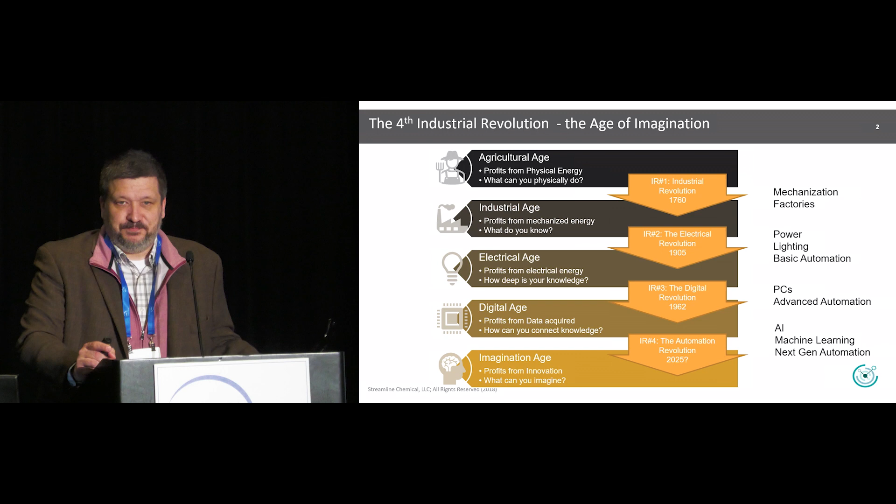And now we're entering the next revolution. This is the age of imagination, if you want to call it. And the question is no longer how can we use computers, but how can we use our imagination, and how can we think outside the box to make things better.

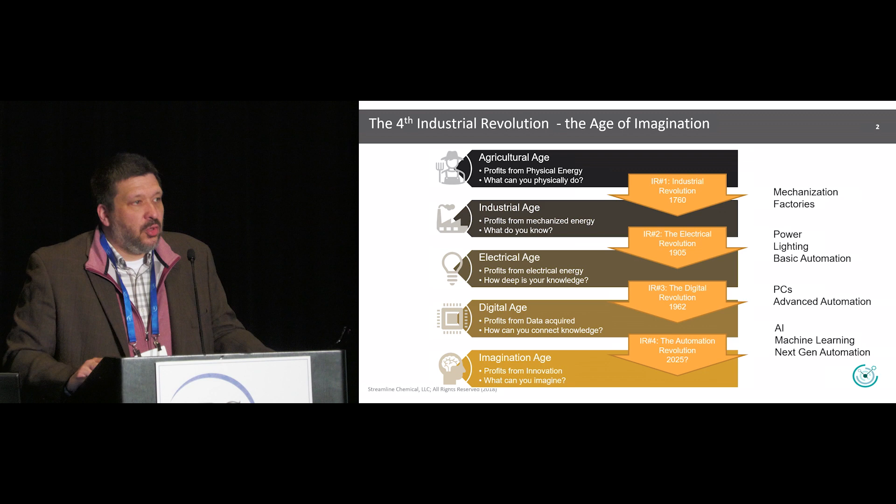Someone mentioned a Star Trek Next Generation scene where the chief engineer says, computer, check the tachyon, blah, blah, blah, and the computer was able to do it. And the question is, how do we get there? My comment is we're kind of almost there from a technology standpoint. The technology always precedes the practicality, which always precedes the oil and gas industry, which is always 30 years behind.

So here's my question. If we can literally take natural language processing and convert that to a bunch of parameters, which then can convert to an image, a photorealistic image of 2 chickens riding a motorcycle that look like stuffed animals driving across a bridge, why can't we apply that to our industry? Why can't we apply that to automation?

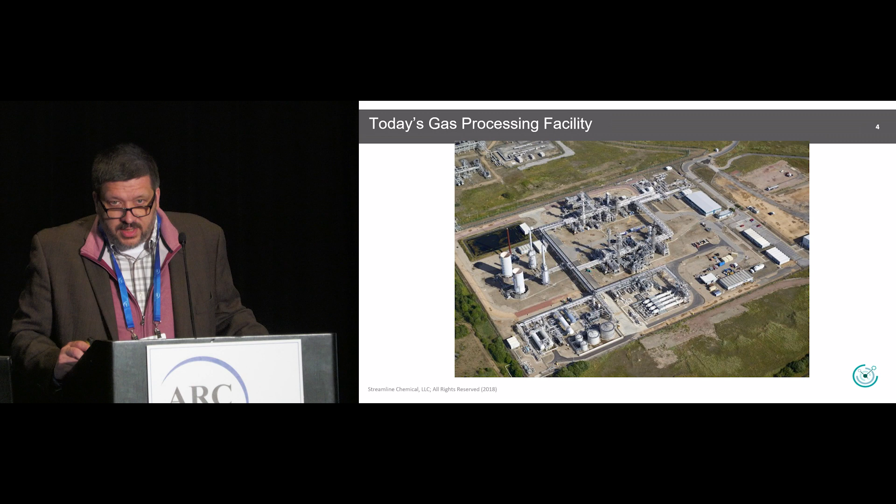So I'm going to show a picture that's familiar to a lot of people in this room. This is a gas processing facility, and I want you to try to take what I just said about DALL-E and apply it to the thought here, okay?

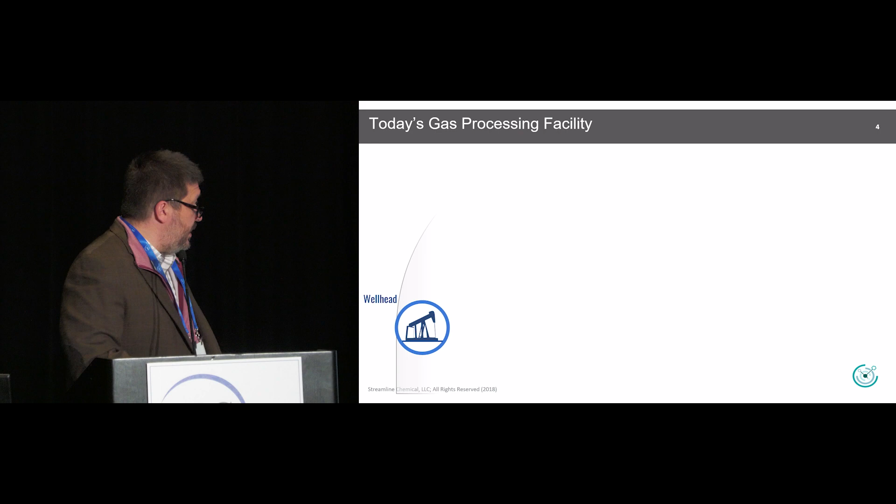So let's simplify this image. You have a wellhead, and then you have a pathway all the way to, say, the sales pipeline or to your stovetop, if you will. And there's a host of pieces of equipment between the beginning and the end.

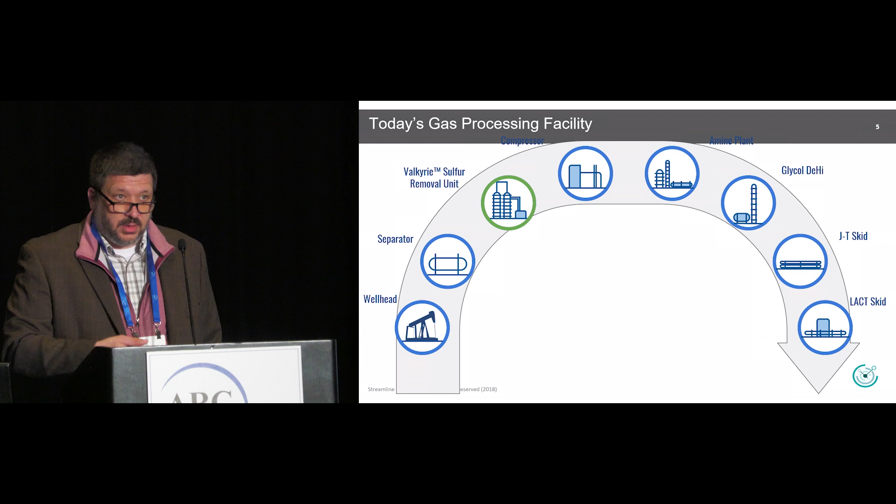And this is our product right here. The third one in is our product, in green here. There it is. I'll get to the story that we've made our unit smart, and I'll talk a little bit about what we do in a second. But for now, take my word, we've made this unit smart.

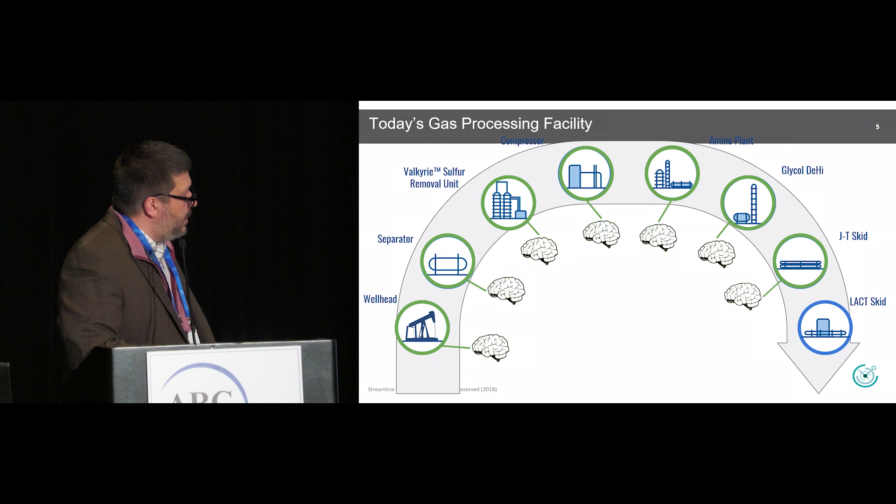But what would happen if we went through this entire gas processing facility and made everything smart? We'll define smart in a minute, but go with it for now. And then we took a hyperbrain and made them all communicate to each other. So you would have a machine learning gas processing facility. You no longer have smart pieces of equipment. This is a smart facility. So this is IIoT brought up to the next level.

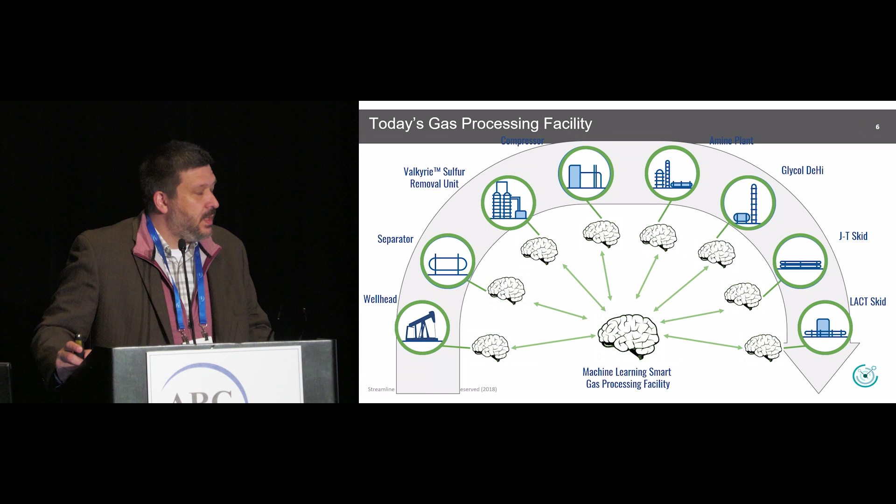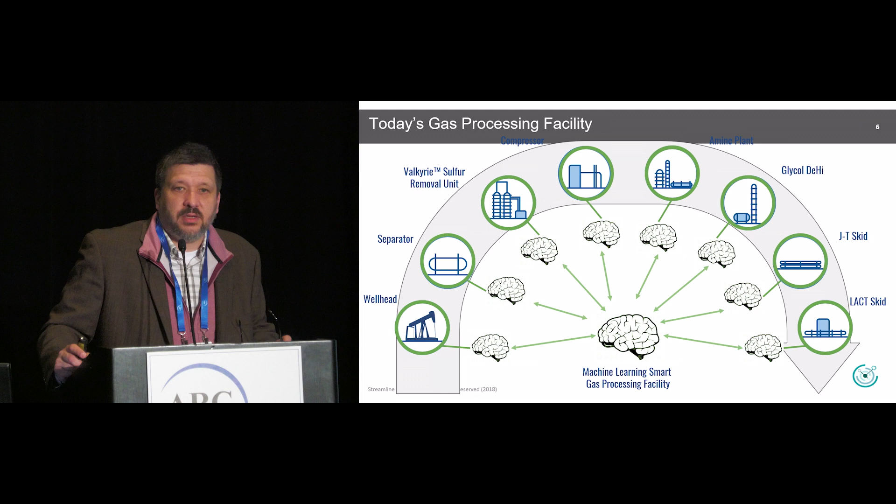Well, I'm going to show you we've done this to our unit, and we've made it smart, and nothing along that system can't be made the same magic we've done to our units, and nothing there is beyond the realm of modern technology. However, how many people here have a fully functional, smart, self-automated gas processing facility? I think we represent probably all the super majors in this room. We'll all say no.

Imagine this: you have sensors at the wellhead that detect a problem, and before it even makes it to the glycol dehy unit, it's already changing its flow rate, changing its temperature to adjust for the problem that happened 30 minutes in advance.

Because the wellhead knows that there's suddenly an influx of water, or the temperature suddenly dropped, or the gas flow rate changed, or the liquid water cuts changed. Any of those factors could come into play, and the amine plant can adjust its flow rate, or add defoamer because it knows something's going to go wrong.

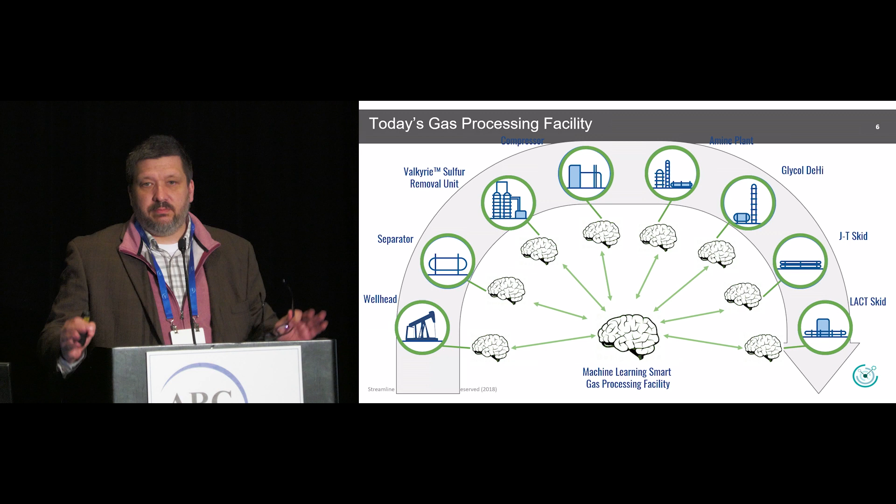All of these things can actually be talking to each other and preempting the issues, solving the problems, minimizing the issues. Not to mention the bread and butter stuff like preventative maintenance or digital twinning, where things are being simulated and optimized.

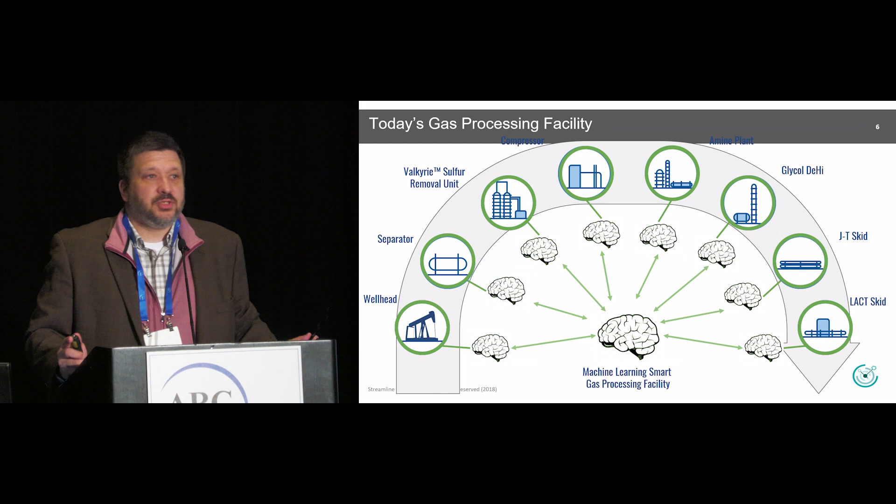I'm talking about just basic, plain old communications between the units. So imagine being able to say, I want to maintain liquid in a vessel or a tank at all times without spilling, and that's my process control command.

That's what I tell the computer, and the computer figures it out. Or keep the reaction rate at equilibrium, or run it under optimal conditions. Those are all process statements that every process engineer wishes could be what they say to a computer, but then they spend the better part of 6 months converting those statements into very detailed statements that can get converted by a programmer into code.

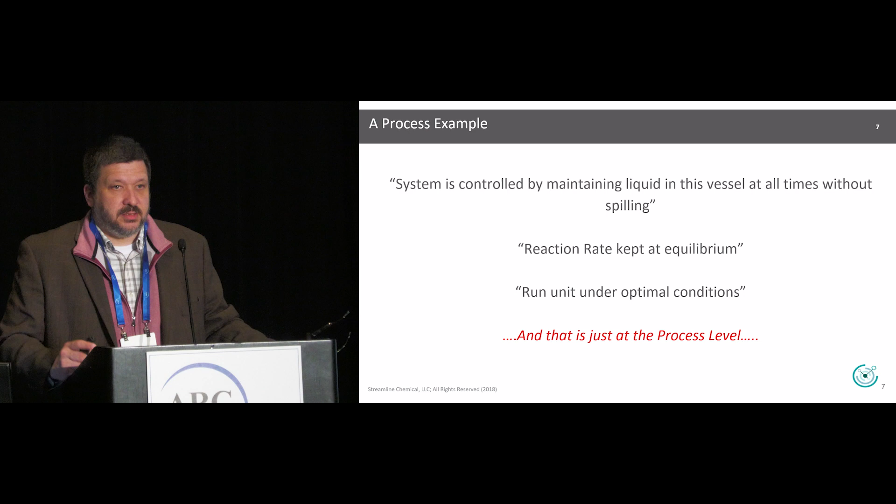Which then gets converted by an integrator into a PLC. So there's a lot of steps when really, in theory, this might be able to be done relatively soon with verbal natural language.

And the reason why is because process designs are driven by the mechanical engineer. We build something, the mechanical or process engineer draws something out, and the process control engineer doesn't come in until after the P&IDs are made. My company is no exception to that—the process control engineer comes in after everything's been designed, so they're not involved in the process.

Process control should be brought up earlier in the system. So what happens? We just have a list of interlocks, PID loops, and there's few industries that have things like model predictive control or AI—few processes—and that's where we've headed to, but very few processes have done that, and it's not that hard.

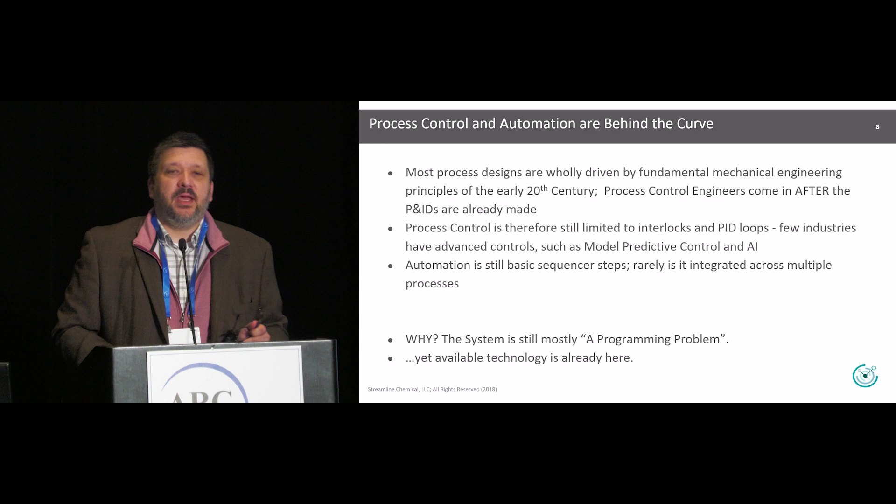And then automation—what's automation for most people here? It's sequencer steps. Do this, do this, do this, do this in order, and that's it. And the reason why is it's what I call a programming problem. The technology is there, but it's a programming problem.

I'm going to distinguish those three—what a programming problem is—next. There are three different approaches to technology, three different generations, so to speak. The first is programming problems.

If any of you remember the X10 modules from Radio Shack in the 1980s, you were able to turn your lights on and off with a box like that on the wall. And if you were good, you could wire up—and if you got the plug-in modules, they had a light switch. But if you wanted to do anything like turn the light on at 6 p.m., you needed a computer, you needed to program in Visual Basic, and send the commands to that box, and that box would then communicate.

And it was really cool. It was home automation, but it was only accessible to people who knew how to program in BASIC and knew how to set this up.

Then we move forward 15, 20 years, and most of us have Alexas or Siris in our homes, and now you plug it in, and the light switch is automatically configured for you, or you configure the light switch. You have to tell it which light switch you want it to control, but it's pretty straightforward and accessible to most of us. But my grandmother still can't do it, because she doesn't really know that box can be controlled by Siri.

There's still—it's a configuration problem. It's not a programming problem. But the last step is auto configuration.

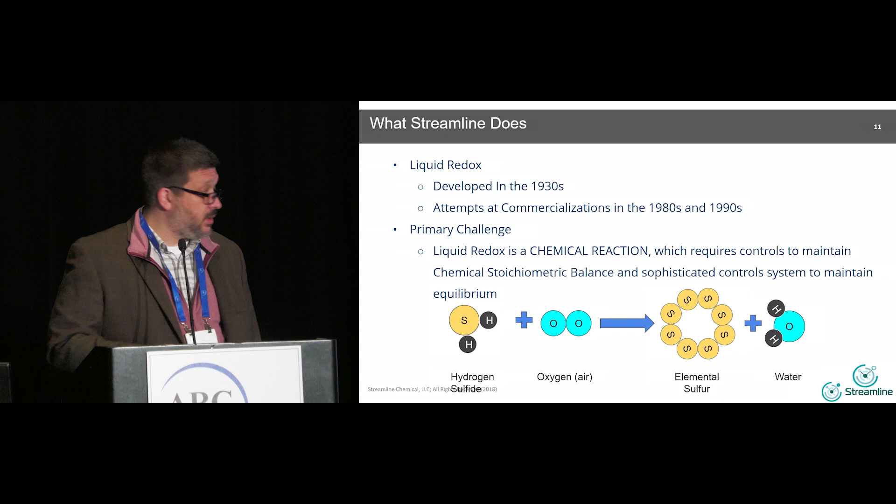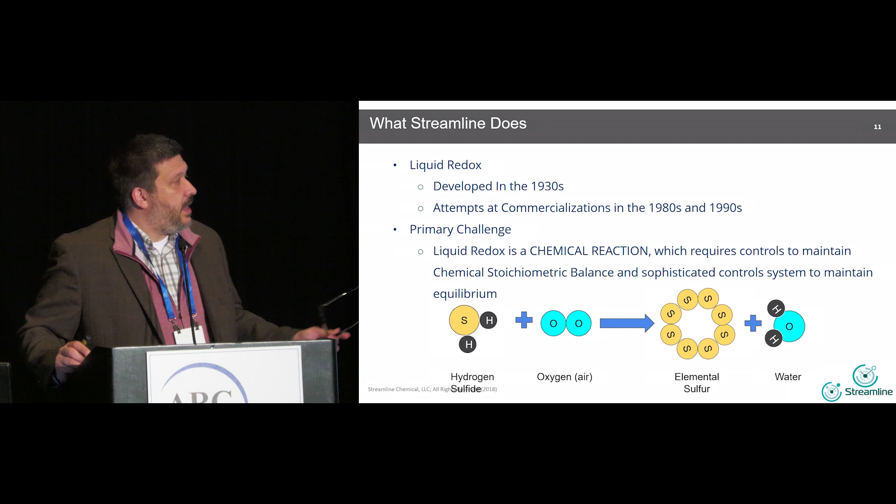We've taken a chemical reaction that converts hydrogen sulfide to elemental sulfur. Hydrogen sulfide is a gas that appears in about 40% of all natural gas wells, 40% of all oil wells, and about 100% of all biogas and renewable natural gas sources. We've developed a process that converts hydrogen sulfide with air, and we create elemental sulfur, which can be used as fertilizer, and water. So we take a toxic gas that's toxic to 1 part per thousand, one breath will kill you, and we convert it to fertilizer.

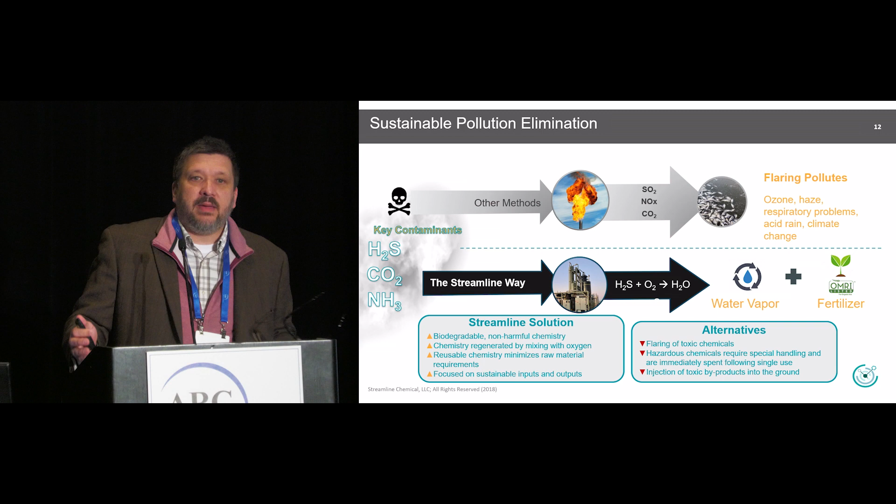So I have 3 important processes to maintain in order to make this system economic. In the old days, this plant had to be roughly 4 times the size of this room, because it was only useful when you had a human being sitting there at the wheel. The gas flow rate changes, the H2S levels change, and someone's got to sit there and maintain chemical balance. So what we've done is we've automated it.

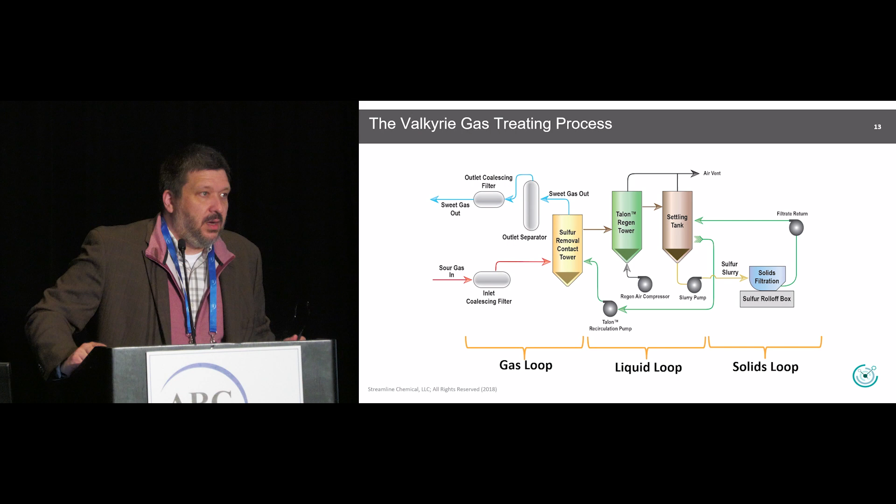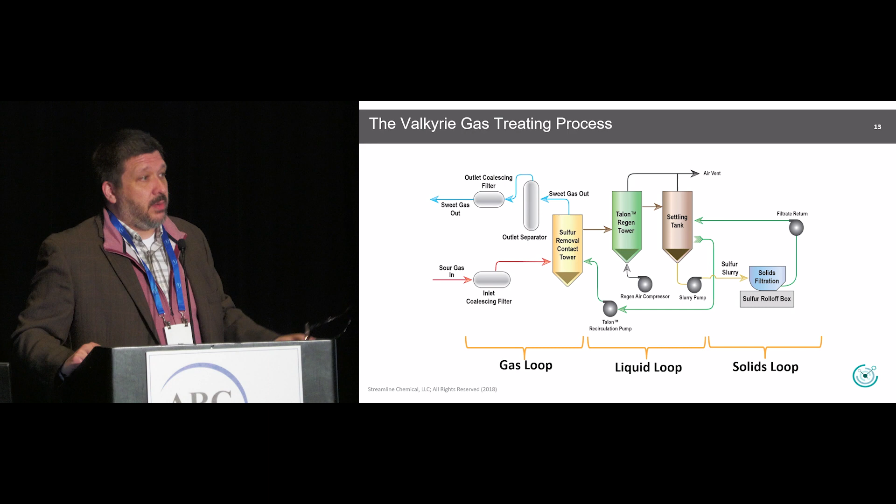That allowed us to build these units smaller and smaller and make them economical at smaller and smaller scales. And we made the awful mistake of our first 2 engineers we hired. One was a mechatronics major from Georgia Tech, and the other was a PhD process control engineer from Ohio State. Neither one of them knew what was reasonable or practical, and so when we said automate it, they automated it completely. It's a good mistake to make.

So I'll give an example of one of our units. This is a Valkyrie, we call our units Valkyries, in Pecos, Texas. I've used this one before. It's 3 amine plants and 3 tail gas treaters. We're taking out H2S and CO2. Coming out of this is a CO2 tailpipe.

A typical amine plant requires half an FTE, plus our units, our old scale units, are about half to 1 FTE per unit. So that means you need between 1 and 1.5 FTEs per unit. We had 6 units on site, 3 units total, there were 3 of these identical. So you're talking 6 to 8 FTEs is on paper what you need. And then you need a maintenance team, you need a support team, you need a SCADA team, you need data, you need all these other things.

And the mission was to do this with 3 FTEs equivalent, and keep maintenance to a minimum. Well, we kind of beat that.

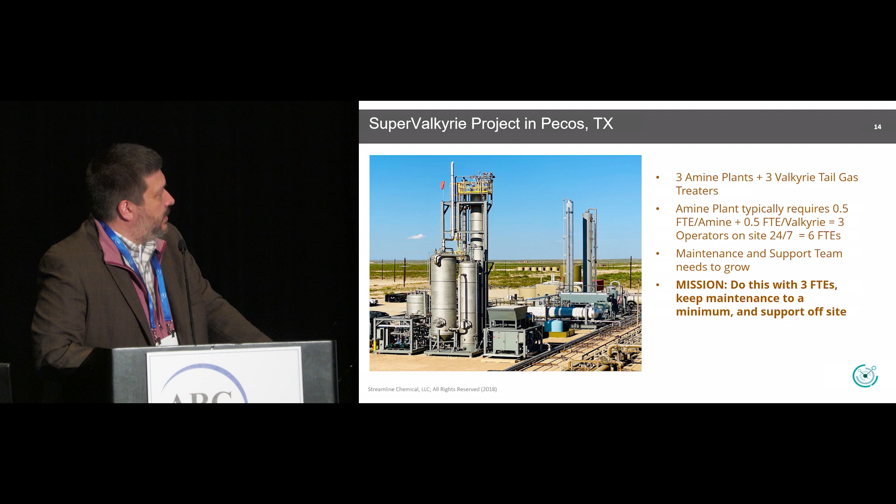So we took the amine plant, we added some intelligence to it, we added what we've done to our own systems, which is automate, keeping track of the chemistry, keeping track of the levels, adding extra sensors, adding extra control elements, making those cascading PID loops, making the model predictive control, which was fairly easy with an amine plant. And we were actually able to optimize our amine plant and reduce that.

And then on our Valkyrie system, we already understand the chemistry. We put probes in, we put the process in, so we can actually maintain that chemical equilibrium in real time. And we got it down to 1.5 FTEs now. Now it's 3 guys who work over a course of 2-week shifts, so about 1.5 FTEs total for all 6 plants.

It's monitored by our control room in San Antonio. They can operate the unit completely. There's complete remote operations. You don't even need a human on site. The human is just there to check, to make sure nothing's spilling, to change the paper on the filter, and to just make sure nothing's blowing up.

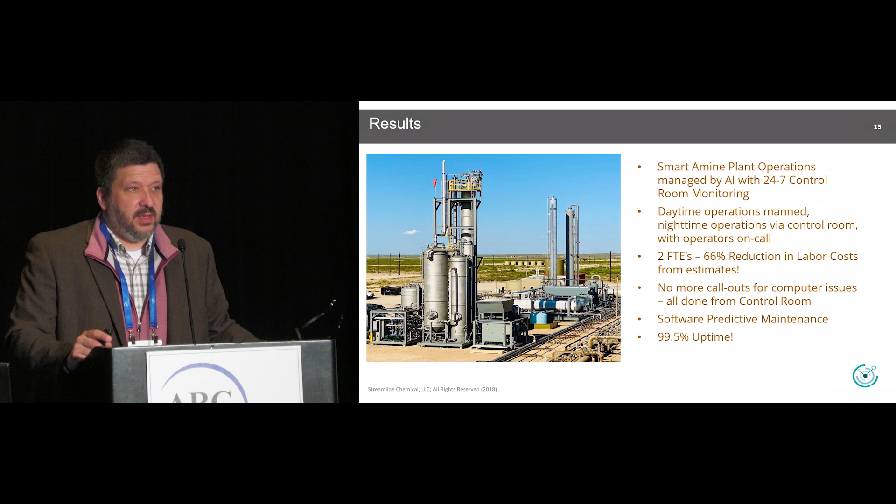We have about a 99.5% uptime, and the connectivity there is abysmal. Your cell phone gets 2 bars if you stand in the right spot. If you stand in the wrong spot, you get 0 bars. We manage this all through cellular connectivity. So we have low bandwidth, and we're still able to do this. So how did we do this? Let's get to the meat of this story.

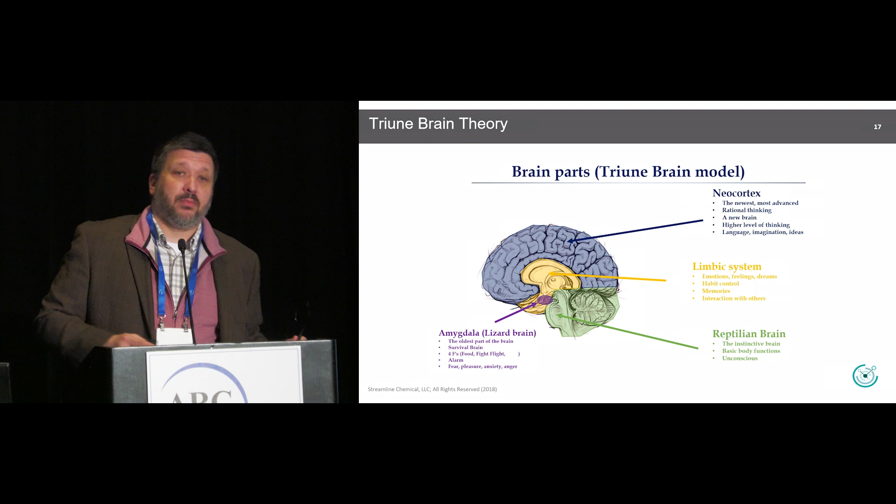We model the brain. The human brain has 4 parts to it. It's called the triune brain, even though there's 4 parts. Your amygdala, which is the oldest part of your brain, your fish brain, your reptilian brain, your mammalian brain, and your human brain. And if you kind of think about process control and controls, your fish brain is the simplest part. That's your ESD buttons.

Your reptilian brain is the part of the brain that never messes up, that never shuts down, never goes to sleep. That's your PLC. Your mammalian brain is your edge computer, and I'll talk about the edge computer, and then finally your cloud, your Watsons and whatnot, is your human brain. So now, if you think about that, your brain operates just like this, right? So different sections are doing different things, and when you sleep, your neocortex sleeps, but your reptilian brain doesn't.

So if you sever the connection in the cloud, there's no problem. It's like you're going to sleep. Your body still breathes. Your heart still goes. If you sever the connection between your limbic system and your reptilian brain, there's some problems, but honestly, it still runs. And if your reptilian brain should shut down, your heart will still beat. So ultimately, the system will not stop running as long as you get simpler things that are more mission critical.

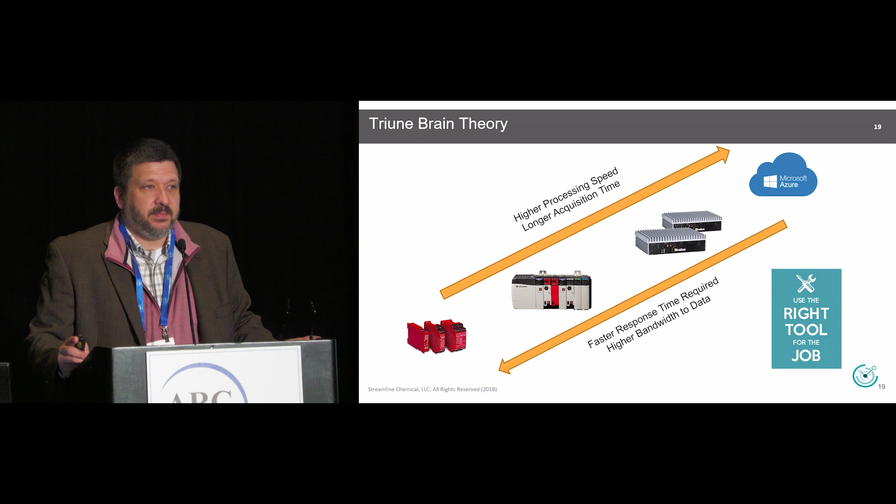So the higher the processing speed, the longer the data acquisition time, you go up to the right, the slower; the faster response time required, and the higher bandwidth you need, it goes down to the left. And so I'm going to kind of lay this out using the right tool for the job, brain versus brawn. Put your brains where they belong and put the brawn where it needs to be. And I'm going to graph this out quickly.

If I look at the computational requirements for a given calculation, and I look at how much data I need to make that calculation, and I start laying out on a map how much information I need. An ESD requires one value, it's an interlock, and requires instant response time. At the other end is machine learning, where I need a huge amount of data and a huge amount of computational power, and it's going to take some time. And you're already thinking that's the cloud, that's your interlocks, that's your ESD.

And then we start throwing other things in. Soft sensors, which can be done at the edge, right? It requires a fair amount of computation, but not a lot of data. Inventory management actually requires a lot of data, but not a lot of computational time. So you could start laying these things out and then taking technology and overlaying it on top of this.

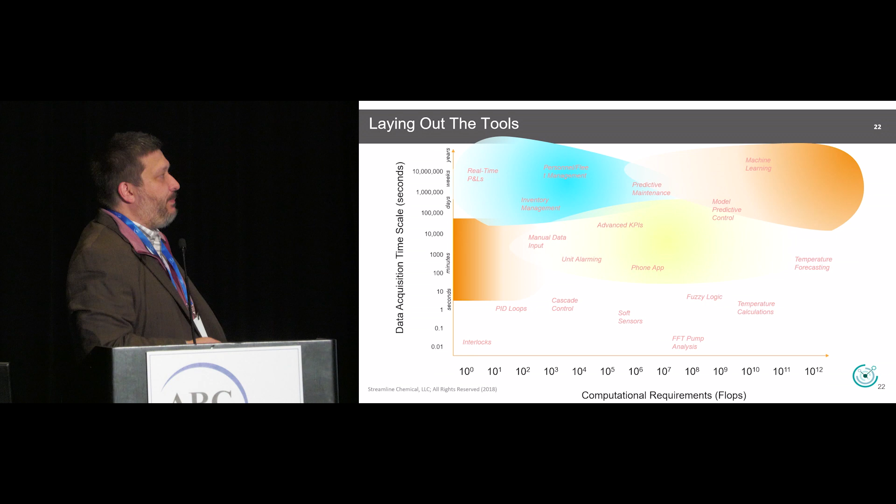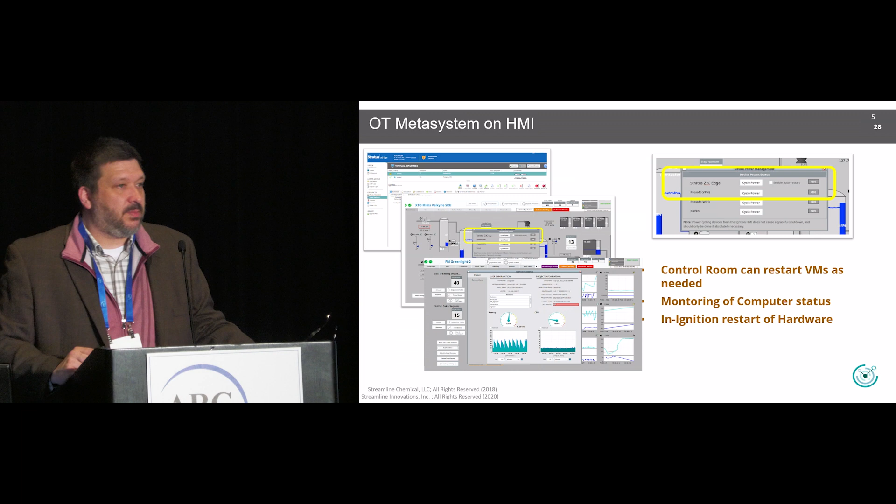So if we have an issue, we could see, was the problem a network issue, was it a memory issue, was it an operational issue? And so that gives us this flexibility because we love gathering data, and so we gather all that data locally, and our units are hosting all of this data. Interesting comment to make, which is worth mentioning.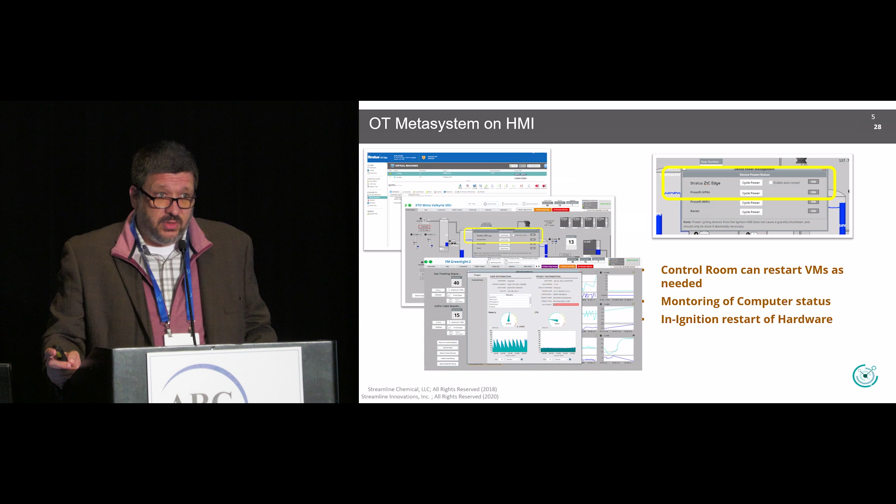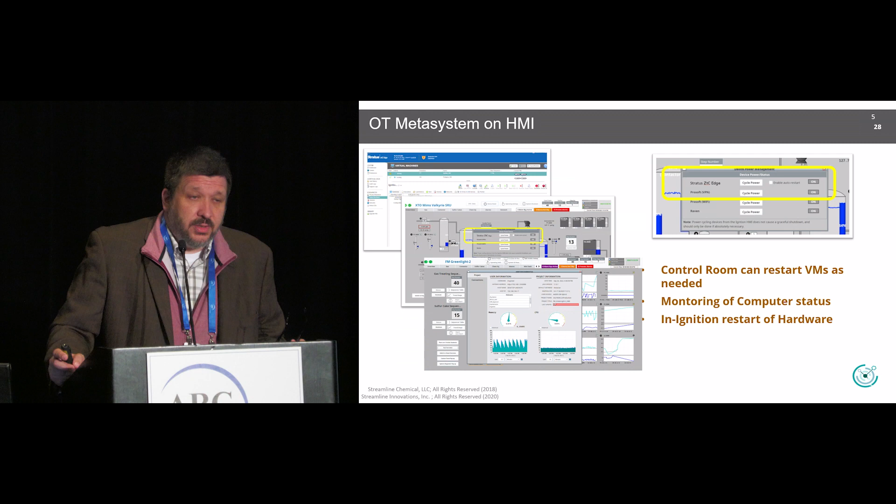About 3 years ago, we had about 3 units. We now have 35 units operating across West Texas, New Mexico, California, and Illinois. We sometimes sell our units, we sometimes lease our units, and we operate about 90% of them. There's only about 3 or 4 we don't operate.

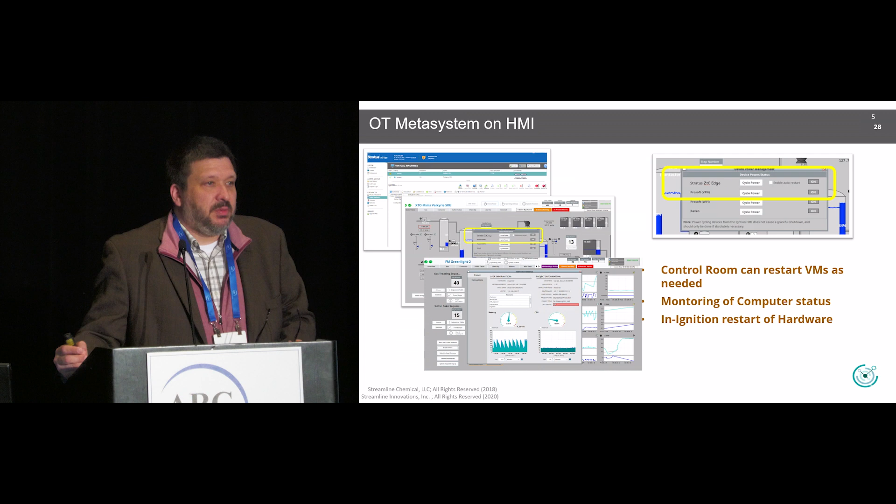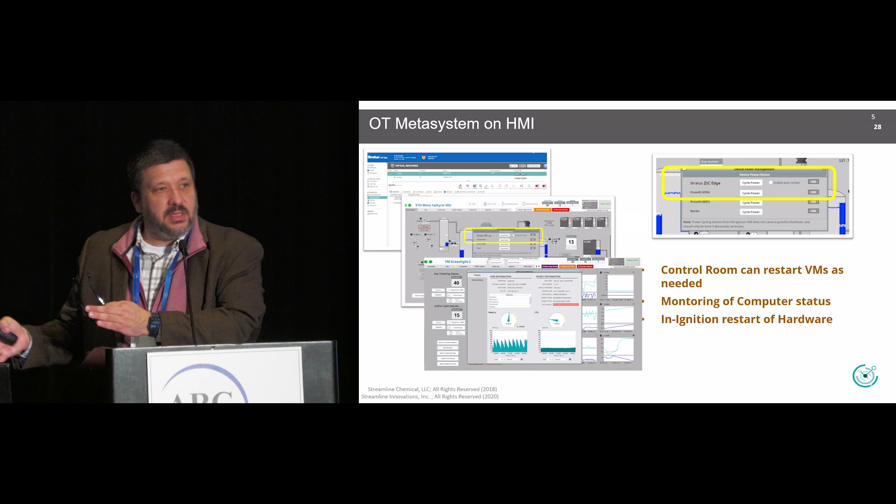So we needed to have a flexible platform, and so every one of our units operates as an independent SCADA system. This is not a hub and spoke where we control from the cloud like it's 16 widgets in a factory. We have 32 factories. Every one is a standalone SCADA system. And so each unit has to be its own independent system, which is why we needed a very beefy computer for each unit, because it is the SCADA system.

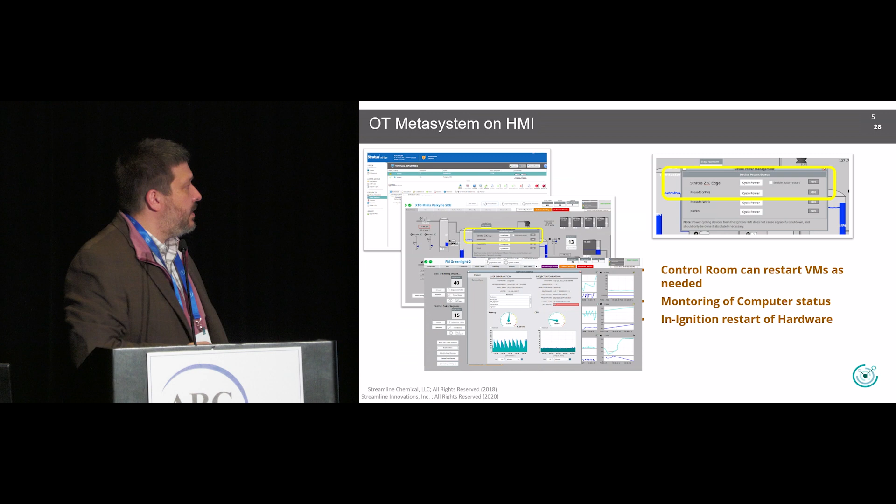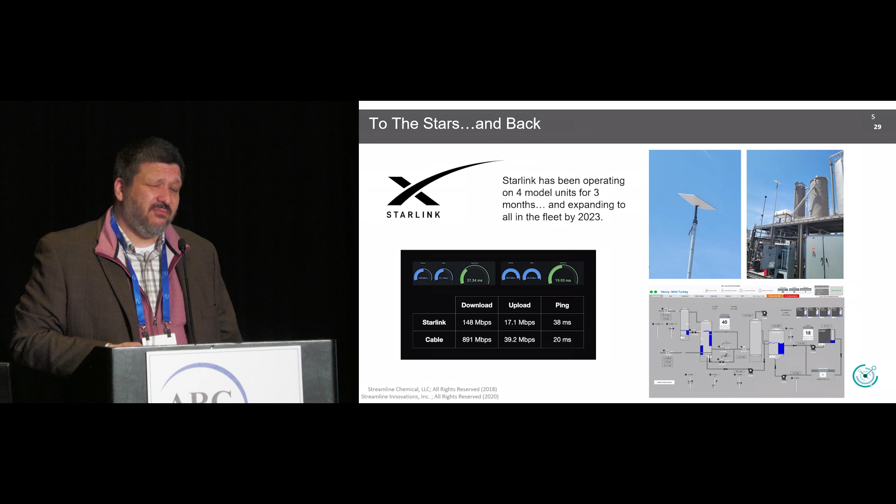And then we need to get that data up to the cloud to be able to do analytics. So we went with Starlink. Starlink is beautiful. Starlink is not very exciting to look at in the field because it's just a dish that doesn't really look like anything. But we have gotten incredible results with Starlink, and we now have about 4 of our 30 units running on Starlink.

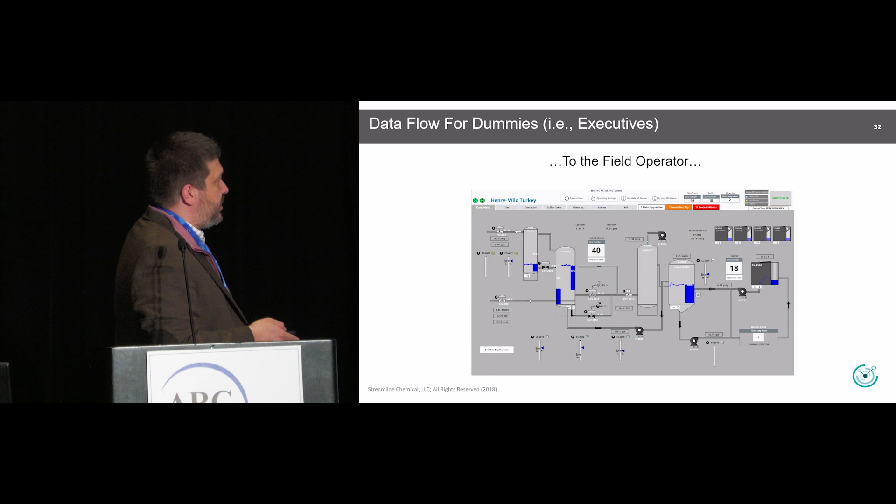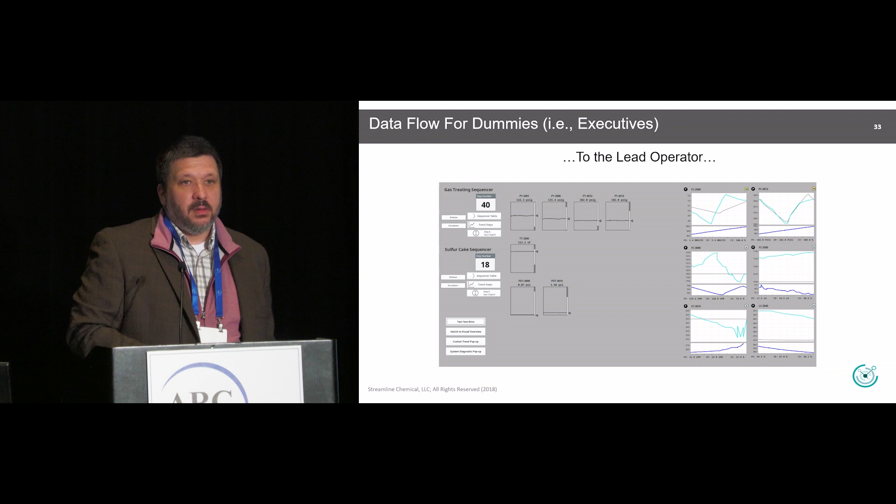So we start with data at the instrument level. Everybody has this. This is great. And where I'm going to get to is at the top of the list at the CEO's office. But we take the data and we build an HMI. Okay, we've done this. You guys have all done this. Nothing exciting. We take that data, we take that HMI, and we start building metadata, so something an engineer can consume. That's a little bit higher up, right? So we've reduced that HMI to a nugget of information.

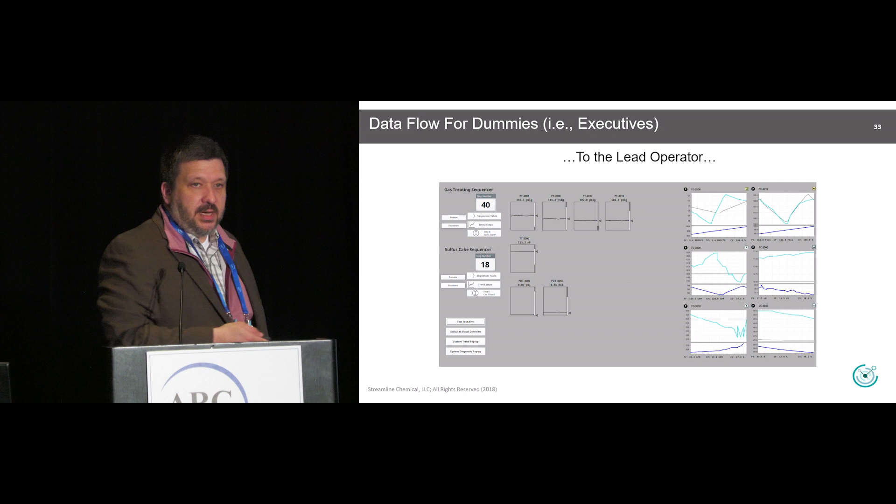So our units are operated by exception. They're not operated by somebody controlling things. So we start creating our exceptions. Then we go to the next level. That's our control room, by the way. That's about 27 units being operated. We're up to 32. And then we create our exception global dashboard, and we monitor all 27 units, or 32 units now, remotely by exception. So now we're up to the top of operations. But we're not done yet, because we could still have data to go.

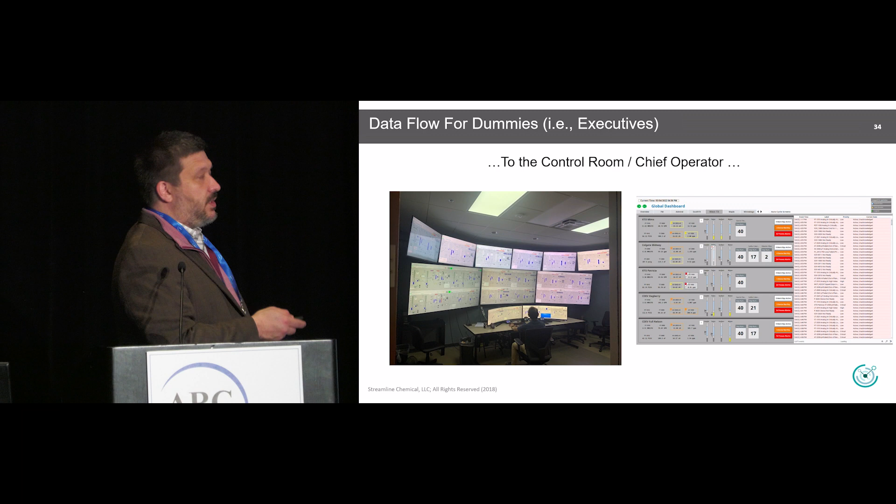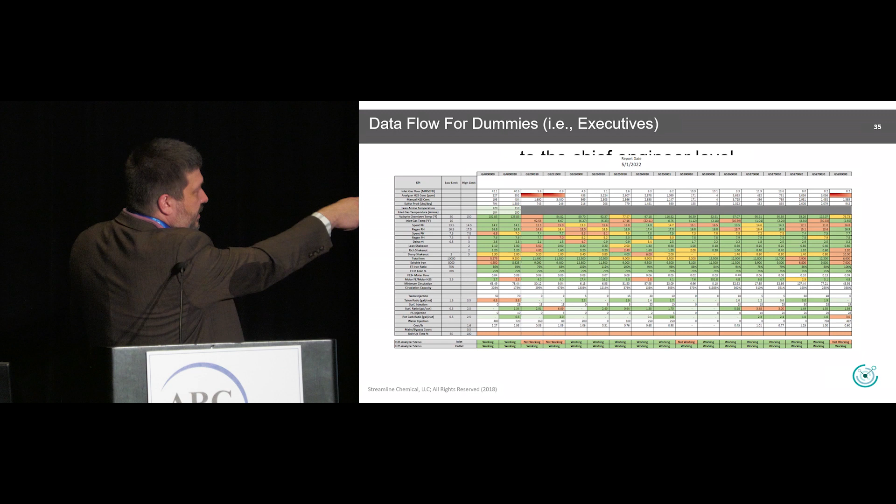And if you'll notice, there's going to be a jump here from Ignition to Excel. And this is the jump that everybody struggles with. And this is going to be our next goal, and this is what we're working on. Because now we take all that data. We have 20-some-odd units running, now it's 32 running simultaneously. We have 30 KPIs for every one of these units. This is the engineering document. The engineer looks at this and says, okay, this unit's running well, that one's not, make these changes and come back. We jump to the engineer level.

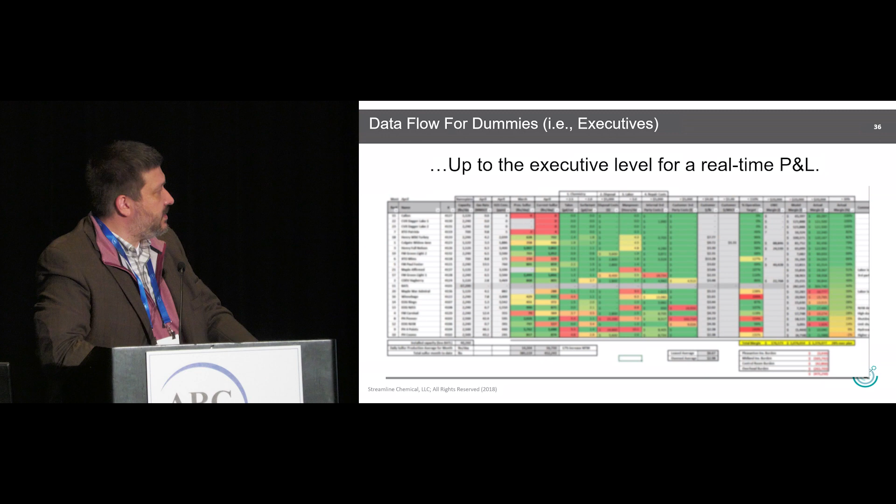But we can keep going because now we can get to the executive level and take that data in a real-time P&L. So we're literally taking the same data and bringing it up and bringing in more, aggregating more, making bigger decisions, and now we get to a real-time P&L. And there's no reason why any of this can't be automated, and I tell you, we're about 2 months away from automating even up to this level. So when you do that, you get from granular to strategic, that whole range. And that's how you transform from multiple units to aggregating your data, to corporate success. We went from 3 units to 32 in 3 years. We've done pretty well for ourselves.

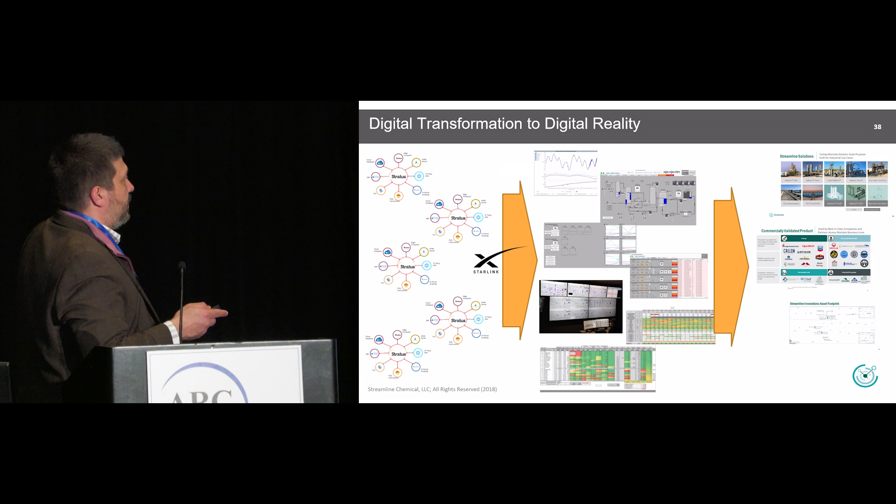And let me go back to the beginning. If we're trying to make something smart, we take a phrase and we add that to a process. Well, we could do that at the instrument level. We've all done that. Now we want to make this unit run optimally, like I described at the beginning. But now we go to the control room level, the I engineer, so to speak. We go from IIoT to I operator to I engineer. Minimize operation time. Now we go to the next level, the I executive.

Maximize profits. And then finally, if you take all of that data and you put that through a machine learning thing, my boss loves this one, an I CEO, have the computer run the company. Yes, it's a bit much, but it's provocative. Tell a computer to run the company, all the way at the top of the level. So that's where I leave you, thinking about automation all the way from instrumentation up to operations level

and executive level. So with that, I thank you for your time. If you have any questions, we'll get to them.